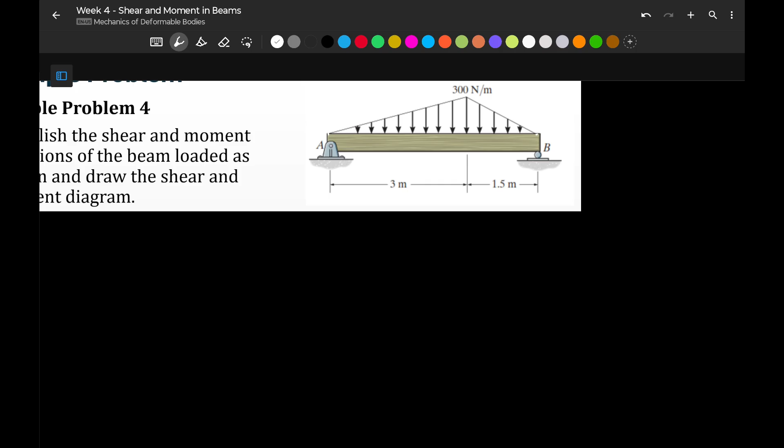So again, our step 1 is to identify the reactions. We have RA and RB. But before we do that, we need to divide our triangular load to analyze it easily, because its resultant is not at the center, not at 3 meters. They're separate, so let's cut our load at the point of 3 meters. We have triangle 1 and triangle 2. Both of these will have equivalent concentrated loads.

Natamahan ng hangin ng aking mic.

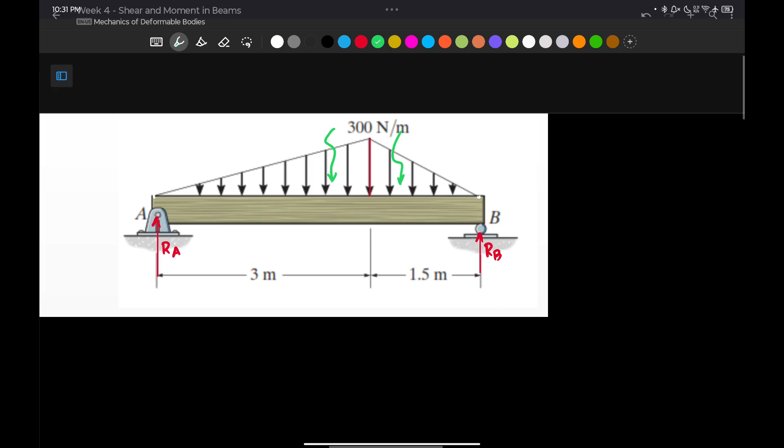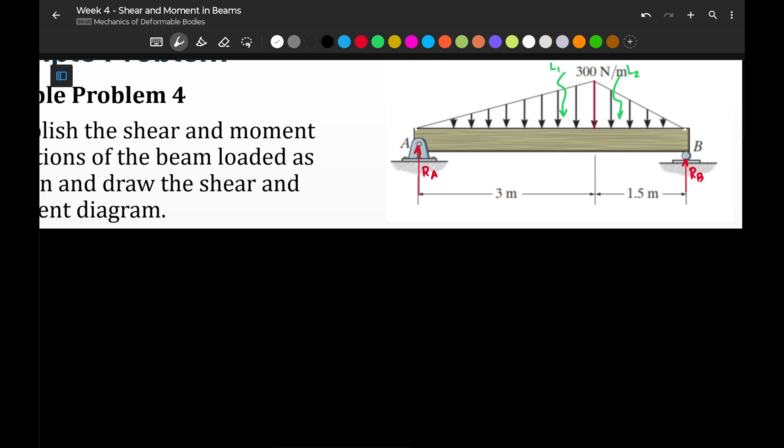Let's get the reactions. We can take summation of moment at A to determine RB, or summation of moment at B to determine RA - either one will work fine. Let's take summation moment at A equivalent to 0, assuming clockwise positive. The forces producing clockwise moment here are L1 and L2. Let's call this L1.

The moment arm of L1, since we measure it from this point, this one will be 2/3 of 3. And for L2, since we're taking moment about A, it becomes 1/3 of 1.5, and we have 3 meters here. 1/3 of 1.5 is 0.5, and 2/3 of 3 is 2. So from this figure, the moment arm of L1 is 2 meters from A.

So L1 times 2, plus L2 times its moment arm of 3 meters from A plus additional 0.5 for the centroid of the triangle, giving us 3.5. This is L1 and L2. Then we have reaction RB causing a counterclockwise moment, so that's minus RB, with moment arm 4.5, equivalent to 0 since there's no other force.

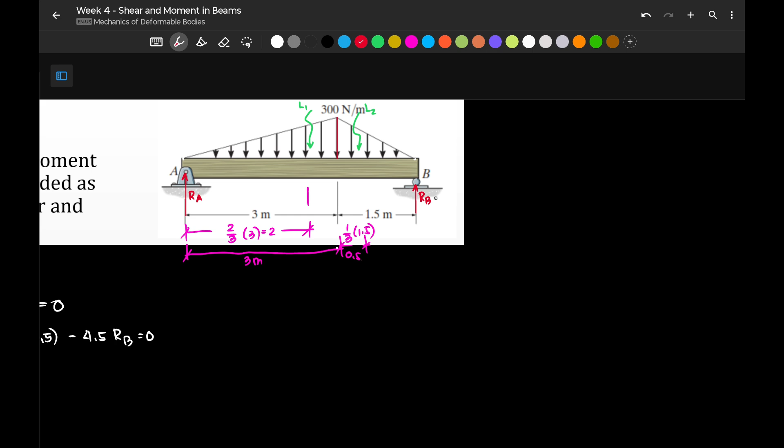Then for RA, we can now use summation of forces vertical equivalent to 0, with upward forces positive. So we have RA plus RB as the positive forces, then minus L1 and L2, equal to 0.

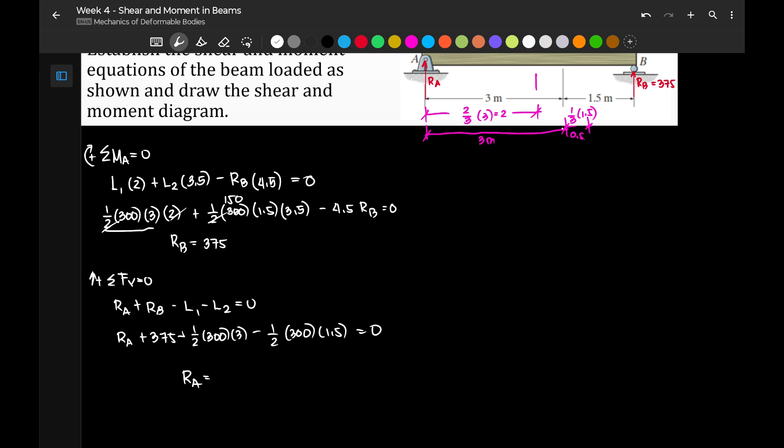RA is unknown, RB we already solved as 375. Our L1 is 1/2 of 300 times 3, and L2 is 1/2 of 300 times 1.5, and that should equal 0 for static equilibrium. So RA will be 150 times 3 plus 150 times 1.5, minus 375, giving us 300. Our units are newtons.

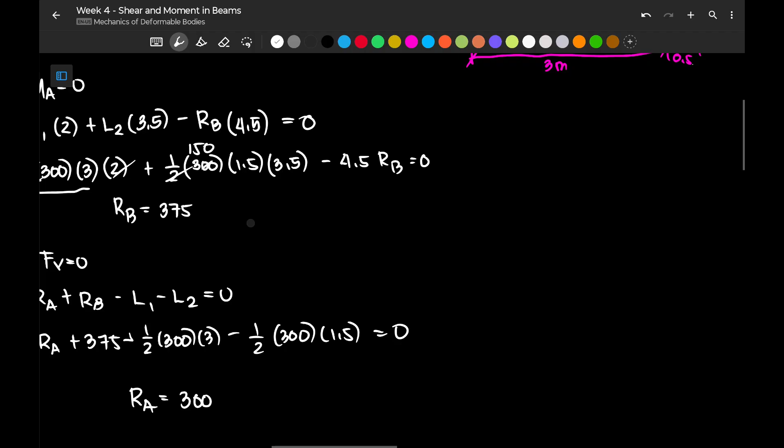Okay, so this is in Newton. This is in Newton, i-note natin rin, this is 300 Newton. Now, second step, establish natin yung mga segments or yung mga points na meron tayo.

Okay, so take note, meron tayong pagpapalit ng loading. Mukha lang siyang continuous yung triangle natin, pero the behavior of our triangular load, increasing siya from point A hanggang dito, then nag-decrease naman siya at point B. So nagkaroon ng pagbabago sa loading. Hindi lang magnitude o pagdadagdag o pagbabawas ng load, pati yung behavior ng load, kung saan siya tumataas, nag-increase or nagdi-decrease, kailangan nating i-note yun.

So let's call this point C. Okay, that is 3 meters from A. So meron tayong dalawang segment, A to C and C to B.

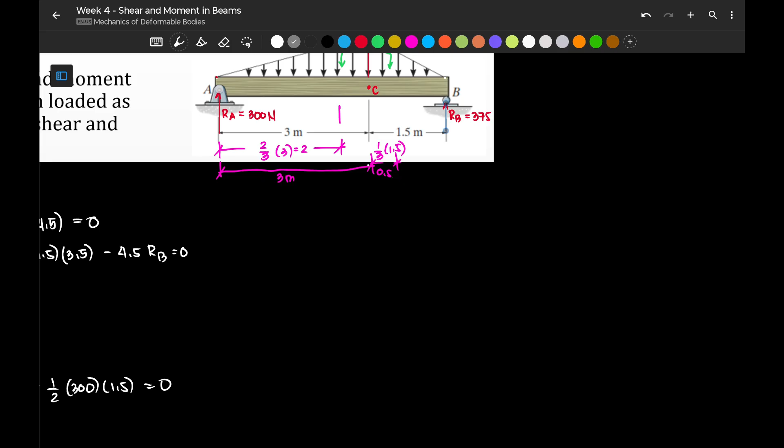Okay, so dalawa yung magiging putol natin, but for now, gagawin ko muna ay mag-establish ng vertical line dito para sa ating shear and moment diagram. Okay, ayun yung mag-autocorrect.

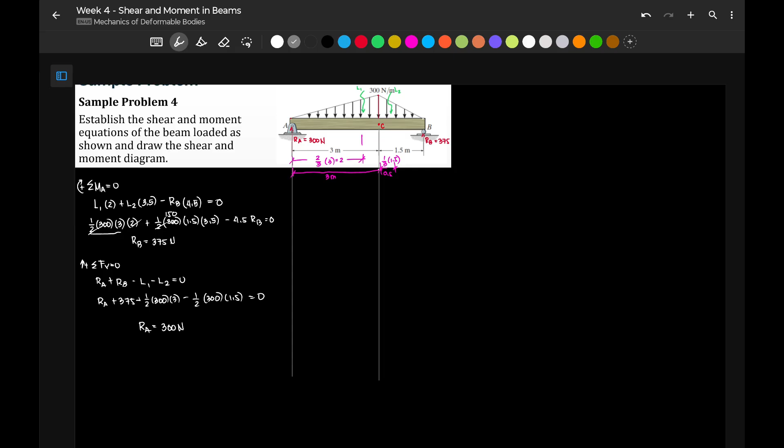Okay, so lengthen lang natin to ng konti. Pwede tayong gumamit ng method of area or method of section sa pag-determine ng diagram. Pero tanong din kasi ng problema sa atin yung equation, so isolve na rin natin yung equations.

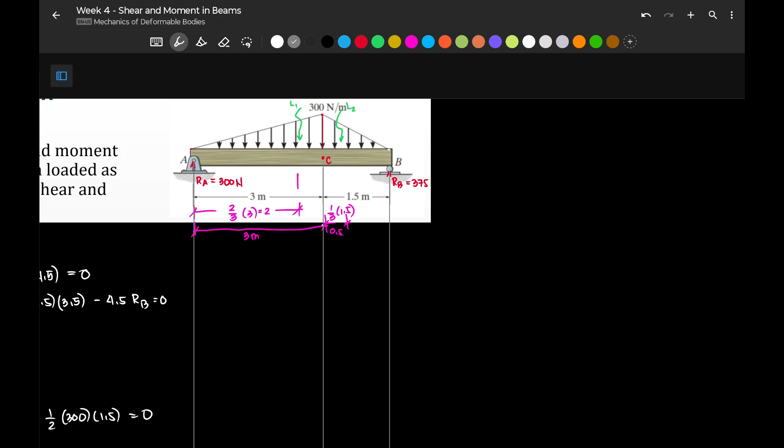Okay, so this one, for segment AB muna tayo, as AC rather. So for segment AC, ang meron tayo kay AC ay cut na lang natin anywhere. Pwede tayong mag-cut kahit saan, anywhere at AC, kahit saan ka mag-cut, okay lang.

So meron tayo ditong beam. I think I have to simplify na lang yung beam para masanay tayo, masyadong matagal. Ayan yung beam na lang natin. Meron tayong vertical reaction dito na 300 Newton, and then meron tayong triangular load. Bahin ko na lang kulay.

Ang distance nito, since arbitrary yung pagkakaputol natin o any value, we call this distance x. Unfortunately, nung nag-cut tayo, hindi sakto sa 300, hindi tayo dito pumutol. Dito lang, so hindi natin alam ito, tawagin muna nating F1. Okay, so dito ngayon, magkakaroon ng internal reaction, meron tayong shear at meron tayong moment. Take note of the direction, pababa si shear so that we assume na positive yung shearing na nangyayari, and si moment naman ay counterclockwise para mag-produce siya ng positive bending moment. Okay, sige, let's try to solve for the value of F1 first.

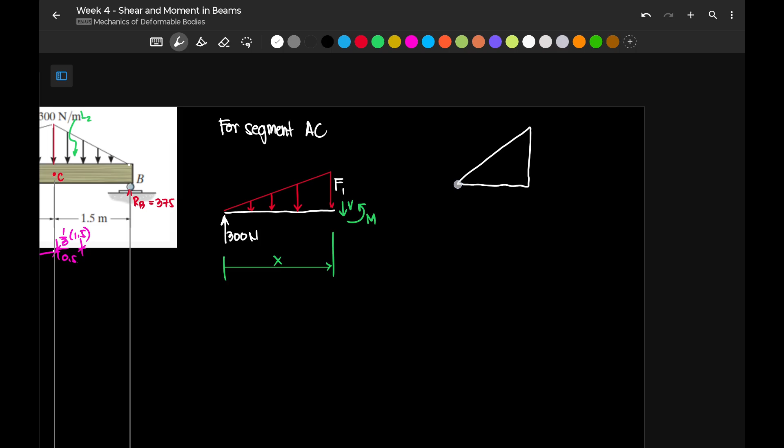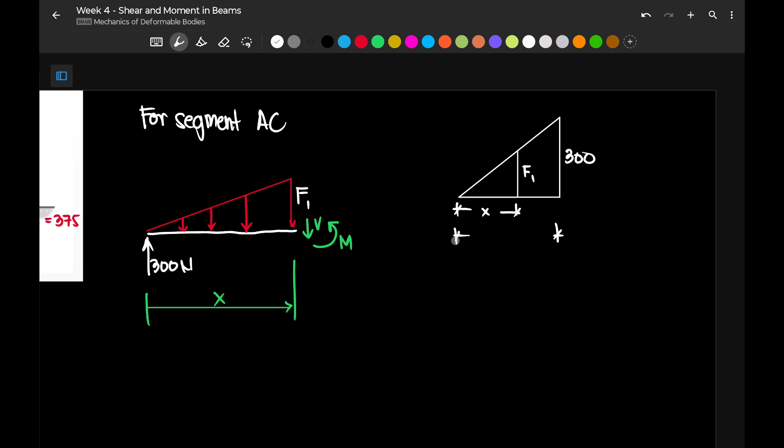Similar doon sa kanina, pwede tayong mag-ratio and proportion or similar triangle theorem. So ito yung triangle natin. Kanina, ang height nito ay 300. Pero since nagputol tayo dito, somewhere along sa gitna, F1 na lang yung nakuha natin. Ang distance ng F1 mula dito kay vertex ng ating triangle, that is x. Ang distance naman from the vertex of the triangle up to this point ay 3 meters.

So by similar triangle, we can say that 300 over 5, yung height ng malaking triangle over its length na 3 meters, that is equal sa height ng smaller triangle which is F1 over x, or F1 is 300, divide na natin to, 60x. 300 over 5, to confirm lang, 60x. Okay, so F1 is just equivalent to 60x.

Okay, so pwede na tayong mag-proceed sa shear equation. Let's take summation forces vertical equivalent to 0, assuming that upward forces are positive. So meron tayo ditong 300 Newton upward force, then may minus tayo, kunin natin yung equivalent load o equivalent concentrated load nitong ating F1, that is 1/2 ng F1 times ang kanyang length ay x. Okay, then may pababang shear force tayo dito, so minus V equivalent to 0.

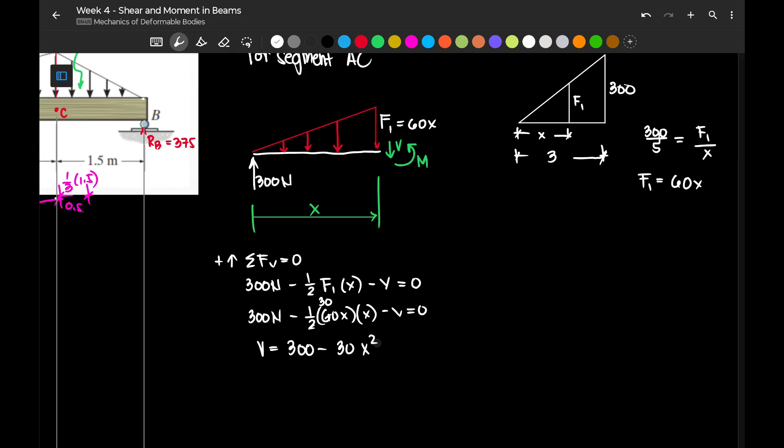So this is 300 Newton minus 1/2 ng 60x, that is our F1, times x minus V equal to 0. Or V is just 300 minus 1/2 ng 60 ay 30. So 300 minus 30x squared. That is the shear equation for segment AC, where the value of x should be greater than 0 but less than or equal to 3. So those are the limitations of this formula.

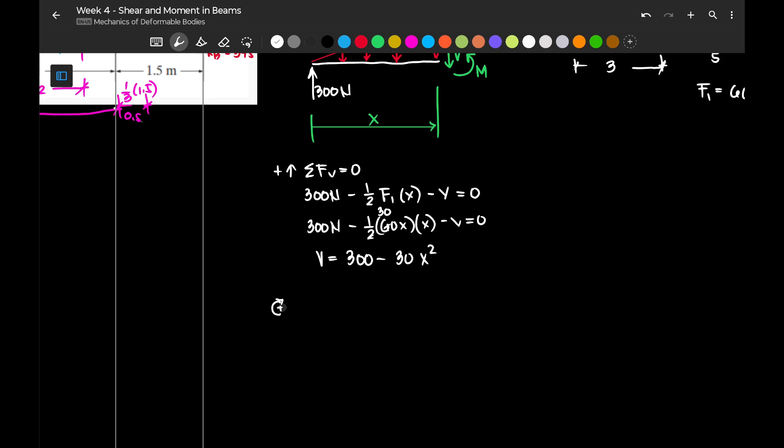Continue na ngayon natin sa moment, tsaka tayo mag-plot later on. Let's take summation moment assuming clockwise positive equivalent to 0. Saan tayo nagmo-moment? Dito sa point kung saan tayo nagputol ng beam. So positive yung rotation ng 300, so that is 300 times x, the moment arm.

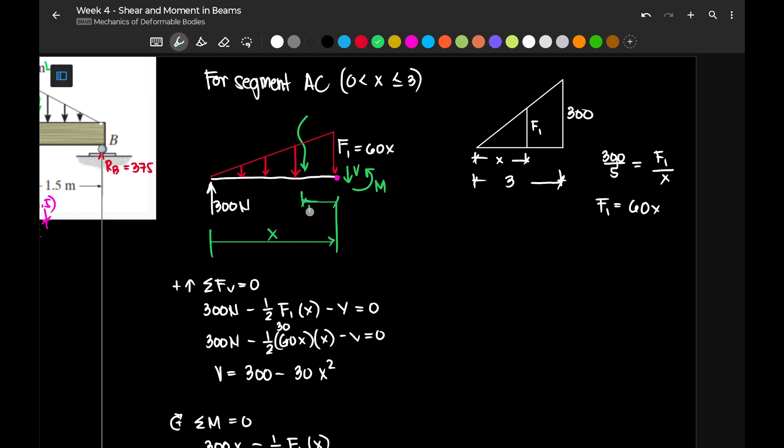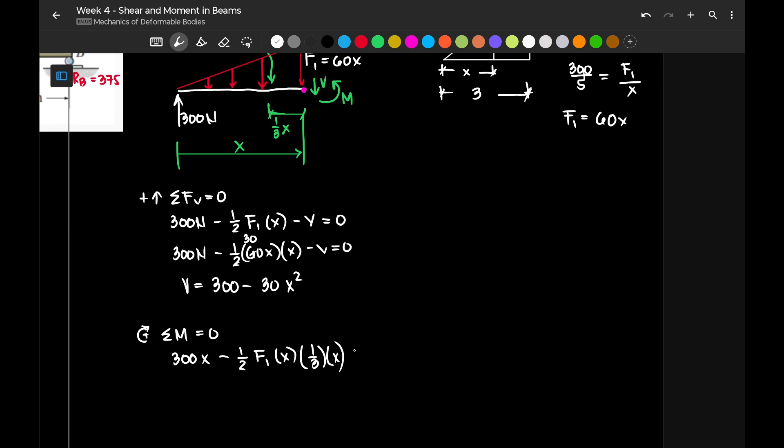And then meron tayo ngayon ditong F1 na uniformly varying, so the equivalent load niyan ay 1/2 ng F1 times yung length niya na x. And the moment arm, kung ito yung concentrated load niya na equivalent, since dito tayo nag-moment, this is 1/3 of x. Okay, so wala na tayong moment dito, pero may negative na internal reaction M dito, equivalent to 0.

So our moment for segment AC is 300 times x. Si F1, take note that this is 60x, so makakancel ito, magiging minus 30x times x times 1/3 of x. Okay, or our moment equation is 300x, 1/3 ng 30 is 10x cubed. So this is our moment equation for segment AC naman.

Okay, so let's proceed on the next segment. Puntahan naman natin yung segment CB.

So, for segment CB, meron tayo dito ngayon ay pababang force, pababa na yung triangle natin. Our values of x should be greater than 3 but less than or equal to 4.5.

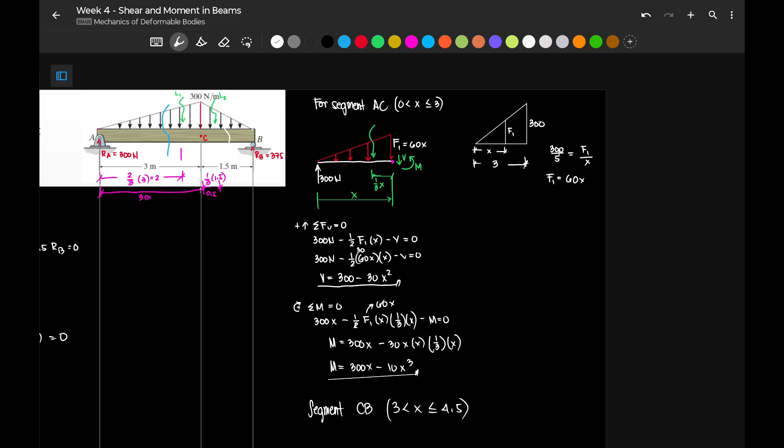Okay, kunin natin yung value. Yung section natin, yung beam natin ay putol. Meron tayong vertical reaction dito which is 300. Ang putol natin ay anywhere along segment CB, kahit saan dyan. Dito, meron tayong nag-peak dito yung 300 and then naputol. Masyado yata maigsi. Naputol naman pagdating dito.

Again, ito yung point kung saan ang length natin ay 3 meters. Ito si point C, ito si point A. Dito na lang sa ibabaw. Ito yung 3 meters, ito, ayan, this one. Ito ay 300, let's call this point F2. Ito yung naputol na force dito sa part na ito. Nung nagputol tayo, may force na lilitaw dyan, yan si F2.

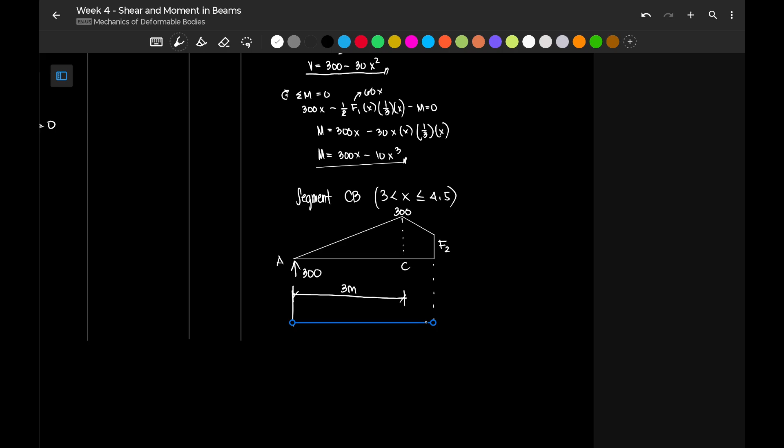Okay, and the distance is still x. Again, we have to find F2. Ano ba yung magiging value ng F2? Let's isolate the second triangle, si L2, yung triangle natin pangalawa. So, ang height ng triangle natin ay 300.

Ang kanyang length ay 1.5 meters, so this is 1.5 meters. Hinati natin, naging trapezoid, ito ngayon si F2. Take note, yung 1.5 meters ay kabuuang length nito. This is 1.5 meters. Ano kaya yung length nito? At saka yung length nito? Hindi natin to pwedeng sabihin x kasi hindi dyan nagsimula ang x natin.

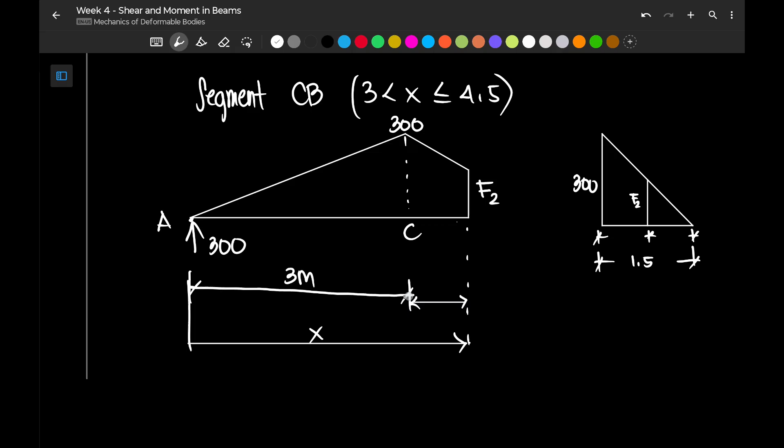Ang x natin ay mula kay point A. So, para makuha natin to, yung part na to from our illustration, itong point na to, this point, yan ay x, dito ay x, minus, bawasan natin ng 3, so this is x minus 3. Yung part na to is x minus 3. At yung natitira naman is 1.5 minus x minus 3. Hindi na kasya, ibaba ko ng konti itong 1.5.

Oops. Ba't nasama ka, boy? Okay. Yung natitirang maliit na part, that is 1.5, yung kabuuang haba, minus x minus 3. Or simply, 4.5 minus x. Okay, kasi kapag binuo natin yan, di ba, bubuin mo yung beam?

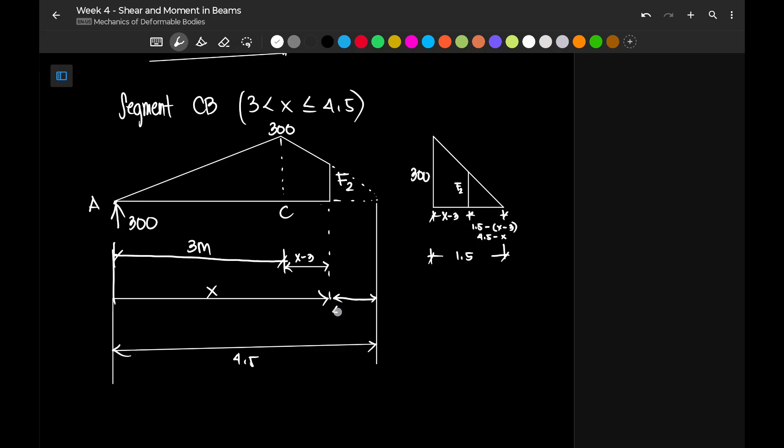Okay, yung distance na to, hanggang dito, ayaw niya mag-autocorrect. Pag binuo natin yung beam, yung distance, yung length ng beam natin is actually 4.5. So, yung natitira dito is yung kabuang length minus x, so 4.5 minus x. Kaya ito ay 4.5 minus x.

So, let's proceed, kunin na natin yung value ng F2. Again, similar triangle, we have 300 over its length na 1.5. That is equivalent sa height ng maliit na triangle which is F2 over 4.5 minus x. So, F2 is 300 over 1.5. Namatay na yung calculator ko. That is 200 times 4.5 minus x. So, this is our F2.

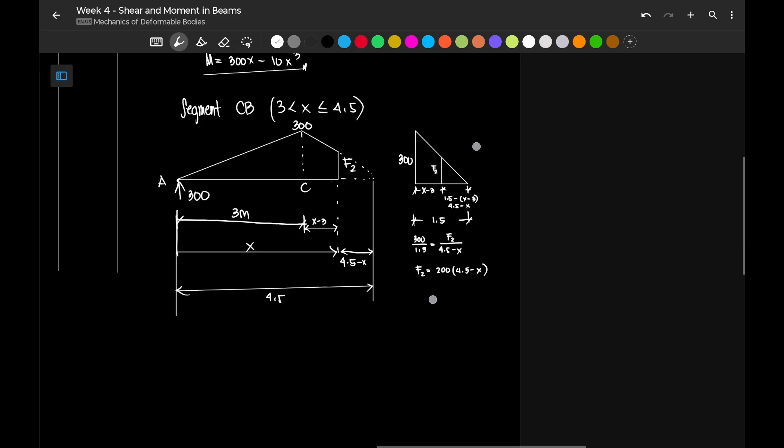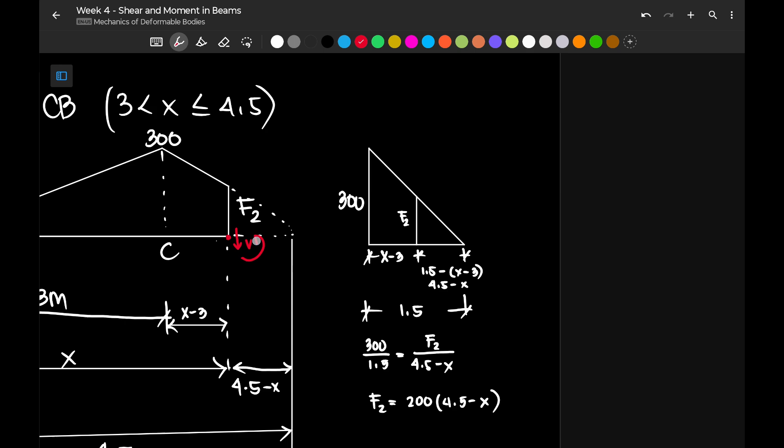F2 pa lang yung kinocompute natin. So, kunin na ngayon natin. Since alam na natin sa F2, kunin na natin ngayon yung ating shear equation. That by taking summation of forces vertical equivalent to 0, assuming upward positive. Hindi natin nailagay na at this point kung saan tayo nagputol, meron diyang internal shear na downward at internal moment na counterclockwise. So, ito pa rin yung point of consideration natin. So, what are our forces?

Meron tayong upward dito na 300. Okay, then wala na, so ang meron na lang tayo, meron tayong mga downward forces dito. Okay, so yan ang meron tayo. Yung itong larger triangle or yung mas mahabang triangle, buo na yung load na sakop natin yan. So, buo na natin i-consider ngayon yan. Ang area niyan ay 1/2 ng 300 yung kanyang height. Ang length naman niya ay 3 meters. So, hindi na si F1 ang gagamitin natin kasi buo na yung triangle.

Then, yung pangalawa naman, that is a trapezoid. So, pwede nating hatiin into a triangle and a rectangle, or pwede nating gunin ng buo. Pero since magmo-moment tayo, mas madali kung hahatiin natin ito into a triangle and a rectangle. So, pagdating sa shear, ang meron tayo ay yung rectangle that is F2 times ang distance na lang niya o ang length na lang niya ay x minus 3. Okay, para naman dito sa triangle, kung ito ay F2, therefore yung matitira dito ay 300 minus F2. So, we have here para sa triangle, minus 1/2 ng 300 minus F2, times ang kanyang length ay x minus 3 din, minus yung ating internal shear na V equivalent to 0.

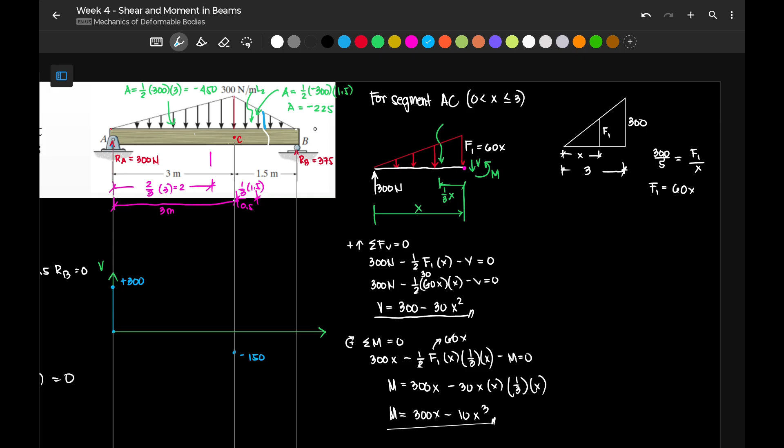Next, if this is 300, the change in load is negative 450. So plus 300 minus 450, we go to negative 150. From negative 150, the change in load is negative 225. So negative 150 minus 225, we go to negative 375.

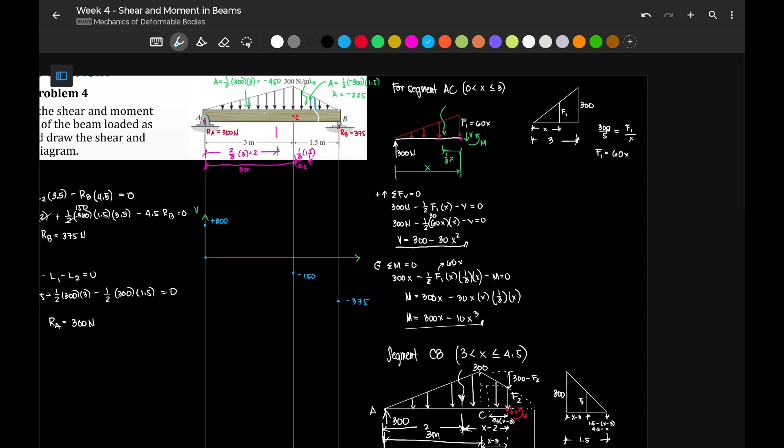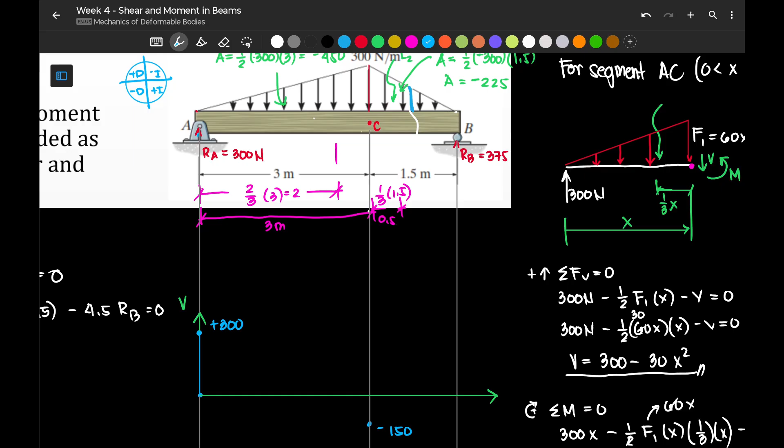Okay, let's plot our curve. We said we can use the PNDI circle - positive decreasing, negative increasing, negative decreasing, positive increasing. Our load from A to C is negative because it's going down, and increasing. So this is our curvature - quadrant 1, going down.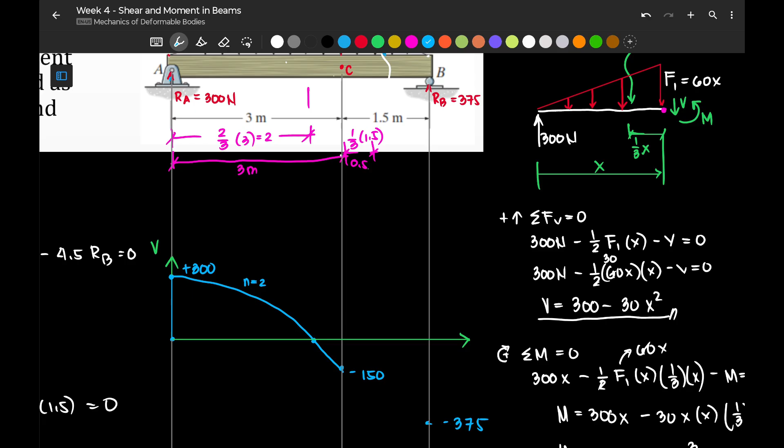Since the degree of our load is 1, the degree here is 2. But we have a point of zero shear here. Next, what about at this point? Our load now is still negative but decreasing, so this is negative decreasing. The value becomes smaller from 300 to 0, so our curvature should be concave downward.

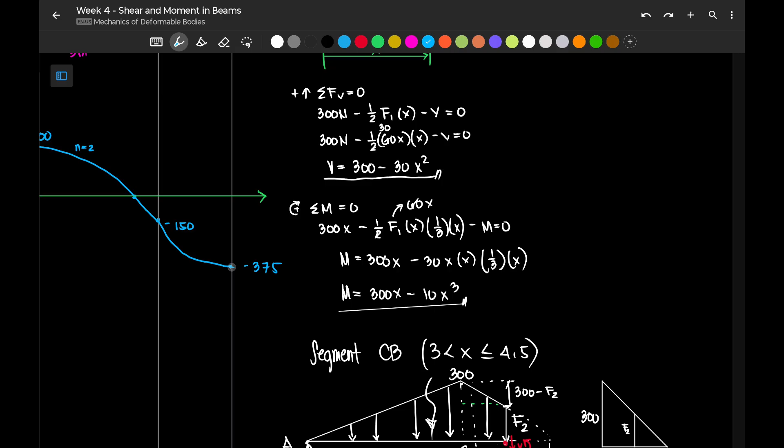N is equal to 2 still. And then at this point, at point B, we have a reaction of 375, closing out our shear diagram. So the area of the shear diagram is easy.

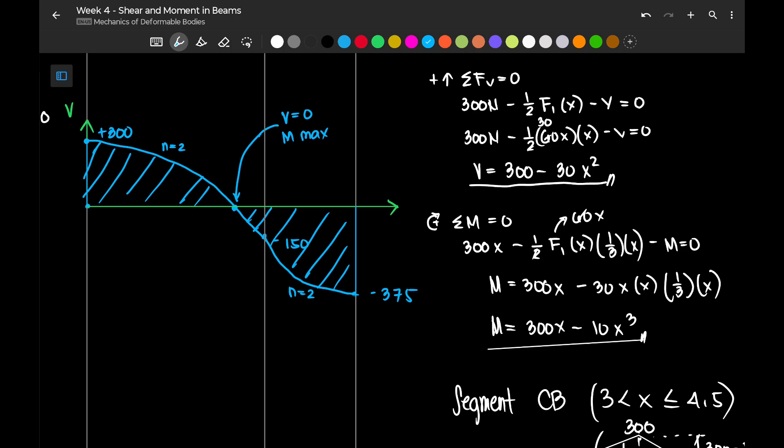The problem is the moment diagram, because we have a point of zero shear here. Take note, at the point of zero shear, when V is 0, our moment is maximum, and that's usually what the problem asks for. So what we'll do, since we know this segment A to C, or the point of zero shear, is in segment AC, let's use the equation.

Let's find the point of zero shear using this equation: V is equal to 300 minus 30x squared. We said the shear is 0, so let's equate this to 0 and solve for x. There will be two values, pick the positive one. So we have square root of 10. I'm not mistaken.

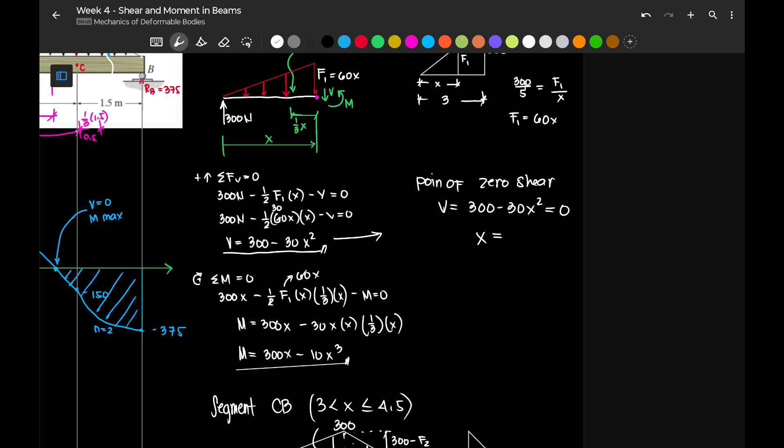3.16, so this doesn't fit. We have 300 minus 30 alpha x squared, alpha equal to 0, shift solve - 3.16. So this isn't possible because it exceeds the limit.

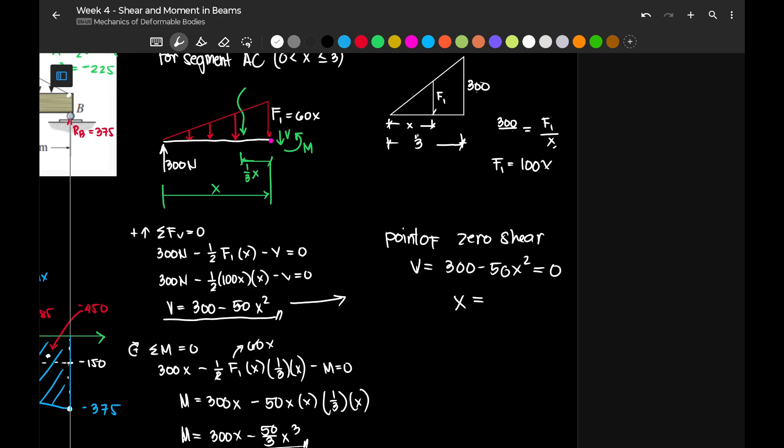Okay, so we made a mistake - that one was fatal. So what happened? Previously, what I wrote here was 5, which is why this became 60x. That is wrong - I misread it, thinking I wrote 5, but it's actually 3. So proper, clear writing is very important.

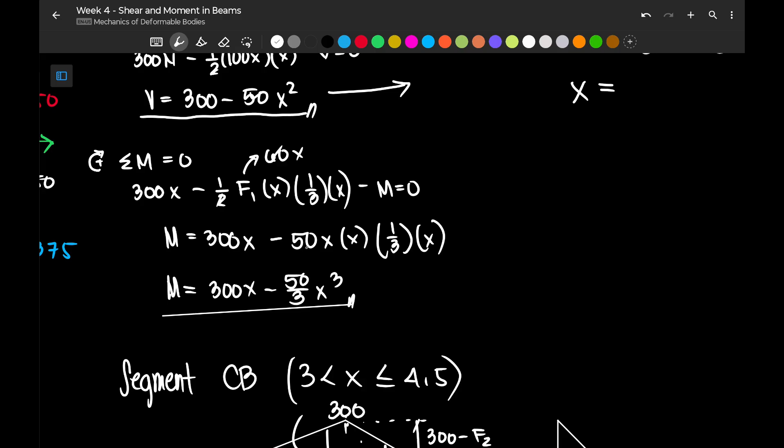So what happened is our value of F1 changed from 60x to 100x. So our equation for shear for segment AC is 300 minus 50x squared, and for our moment, that is 300x minus 50 over 3, so it becomes 50 over 3 times x cubed. Nothing changed for the second, shorter segment, since F1 isn't involved there. So our formula for moment stays the same, and our formula for shear stays the same.

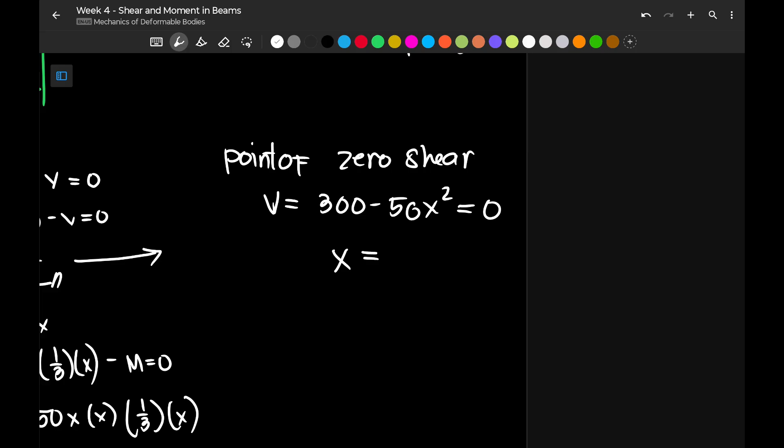Okay, let's correct this value. Since we found the location of zero shear, V equals 300 minus 50x squared is our formula. We can substitute 0 into the shear equation to get the value of x.

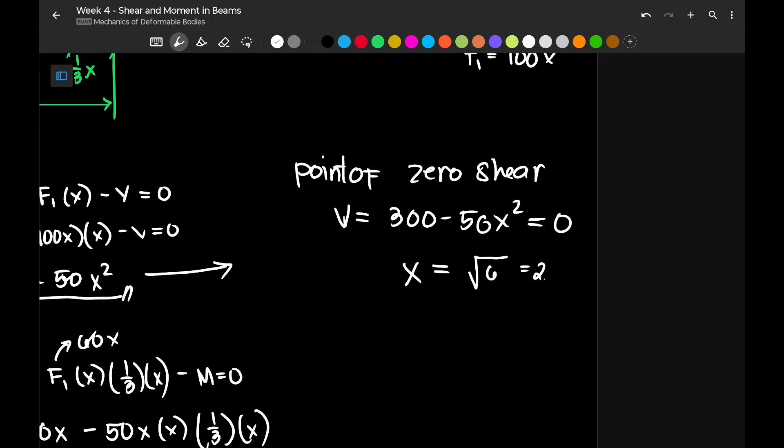We can transpose. Square root of 6, so this is square root of 6, or 2.449. So this is the location of our zero shear.

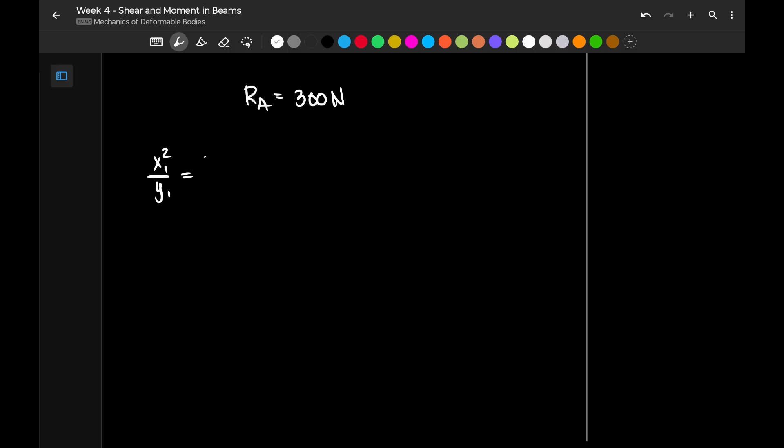Another way to do it is using the squared property of parabola. Since our vertex is here on the shear moment diagram, we can use this property: x1 squared over y1 equals x2 squared over y2. We can also use this for the third degree: x1 cube over y1 equals x2 cube over y2. So what do x1, y1 and x2, y2 refer to? They are the coordinates of a point on the parabola.

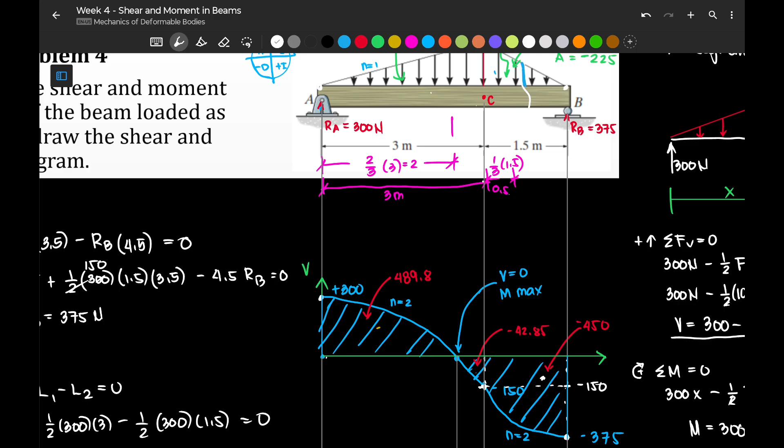Let's take this parabola. We need to draw this parabola. The vertex is at this point. Why is that the vertex? Because here our load becomes zero. Let's isolate that parabola.

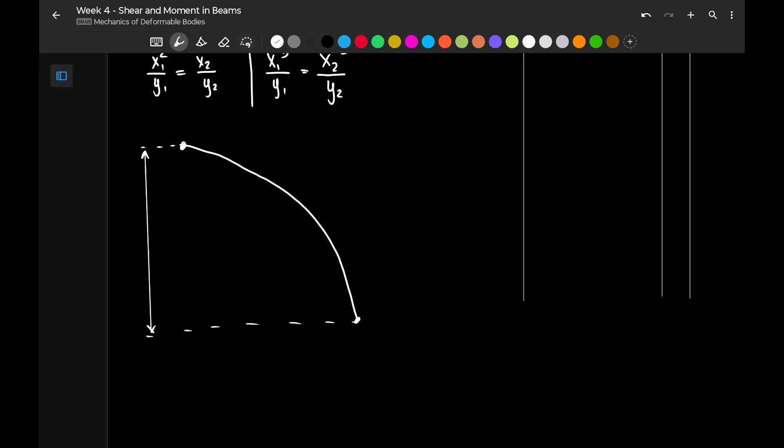What we're getting is just the vertical distance - we're not considering the sign convention. So if it's 300 up to here, then 150, the total height of our parabola here is 450. Then the horizontal distance from this point to this point is 3 meters.

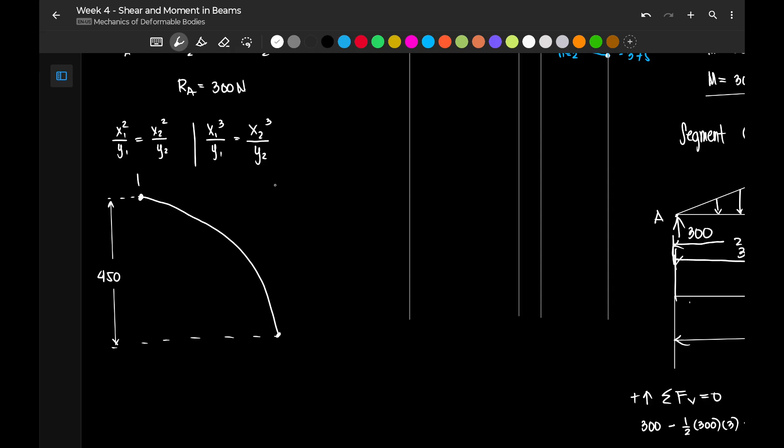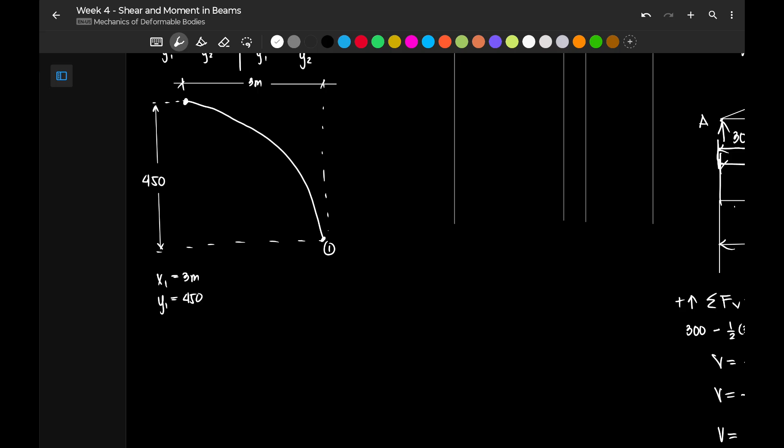So we can say this is 3 meters. So we have two known points. If this is our vertex, we can assume its coordinate is 0,0 for now. So what we know, our x1, is 3 meters, if this is our point 1. And y1 is 450 newtons, or kilonewtons maybe.

Newtons actually. Then we have an unknown point 2. Point 2 is the unknown point with missing data. So point 2 is somewhere around here. Let's say this is point 2. And the location of our point 2 is 300 downward, because point 2 is exactly at the value of our beam at zero shear.

So this is 300, right? So this one is 300. And we don't know this distance.

This is what we solved earlier, the x value. We know it because we already solved it. But if we're trying to use this method, we don't know it yet, right? This is our, let's call this x also, measured from the vertex. So this is our x2, unknown. So let's apply the squared property of parabola to this one.

What we get is 3 squared over 450, that is x1 squared over y1, equivalent to our x2 squared over 300. So here we can say x2 should equal the square root of 3 squared over 450 multiplied by 300... sorry, let me redo that.

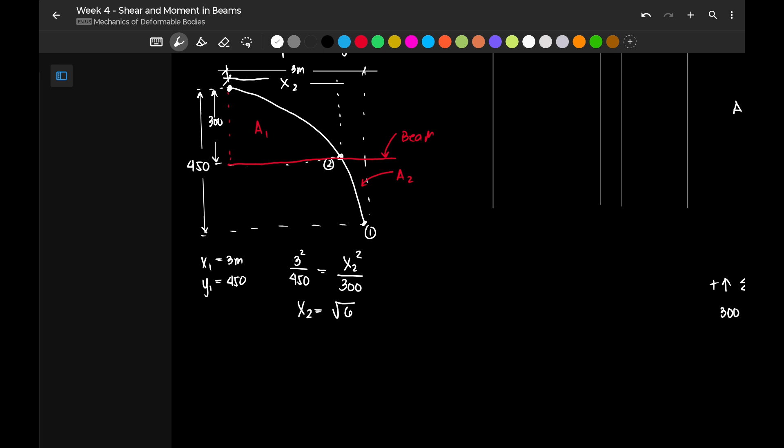So let's call this one area 1, and let's call this part area 2. Let's try to solve using the method of area. So in getting our area, as I discussed earlier, we can use the formula 1/3, 2/3 if our parabola comes from the vertex or covers the vertex. So how do we do that? For area 1, it's easy since it has the vertex, we can use 2/3.

Itong part na to magiging 2/3 kasi siya yung bulging, siya yung naka-bulge. This is 2/3 ng yung length niya ay x2 times 300. Or that is area 1 is 2/3 ng square root of 6 times 300.

Okay, burahin ko na dito para hindi magulo. So that is 2/3 of square root of 6 times 300. We have

489.898 newtons. Now, pagdating naman dun kay area 2, this one's a bit complicated kasi ang area na hinahanap sa atin ay itong part na ito. Okay? So, paano natin kukunin yung part na yan?

Sir, pwede natin gamitin si 1/3. Hindi natin pwedeng gamitin si 1/3 kasi wala doon sa parabola yung vertex. Kung kukunin ko yung 1/3, dapat manggagaling yung parabola ko sa vertex. But ang pwede natin gawin is, we can determine yung area ng parabola dito.

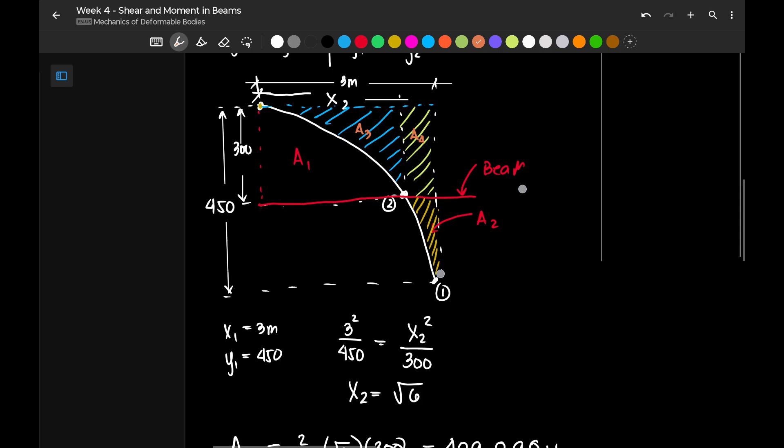area 3 at ito naman si area 4. So si area 3, pwede nating makuha kung itong area 1 is 2/3, si area 3 naman is 1/3 kasi nandun yung vertex at they are in the same rectangle lang naman. Ano? So hahatiin lang nila yung rectangle, yung malaki ay 2/3, yung maliit naman ay 1/3.

So si area 3 is magiging 1/3 square root of 6 multiplied by 300. So that would be 1/3 na square root of 6 times 300. We have 244.949 Newton. Okay. Now si area 4, rectangle lang ito.

Rectangle lang siya na ang kanyang length naman ay 3 meters, yung kabuuang haba hanggang dito, bawasan natin ng x2, kaya 3 meters minus x2, ang kanya namang height ay 300. So we have area 4 equivalent to 300 minus square root of 6 times, 3 meters rather, 3 meters minus square root of 6 times 300.

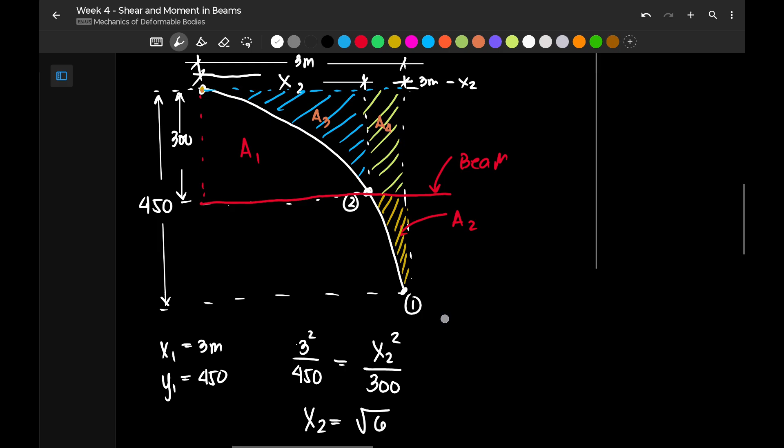Okay? 3 meters minus x2 times 300. x2 is square root of 6. So we have now 3 minus square root of 6 times 300. We have the area of 165.153 newtons. Now, take note, ang sinolve na lang natin ay si area 3 and si area 4.

Pero ang hinahanap sa atin ay si area 2. So, meron tayong malaking parabolic spandrel dito. Okay? Na ang kanyang height ay 450, ang kanyang width ay 3 meters. Yung malaking parabolic spandrel na yan ay binubuo ng area 3, area 4 at area 2.

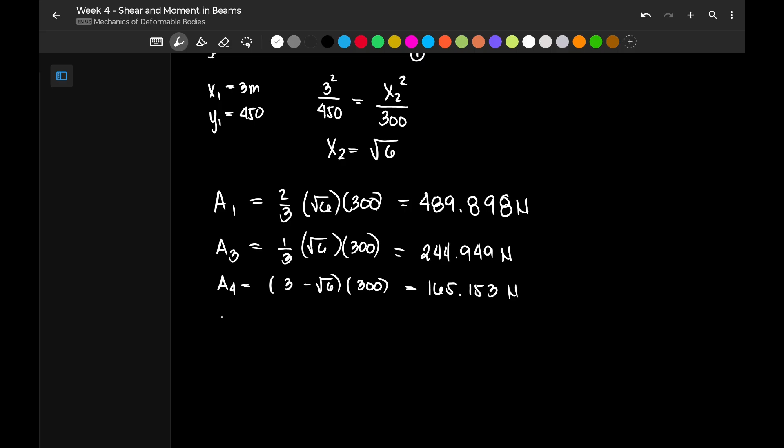So, basically, yung bigger parabolic spandrel, ang kanyang formula ay 1/3 kasi siya ay naka-concave. Yung pag naka-concave, ang ginagamit nating formula ay 1/3. Kapag naka-bulge, 2/3. So 1/3 ng 450 times 3.

Ito yung malaking parabolic spandrel. Okay? This one, yung mas malaki na to. Okay? And that is equal sa area 2 plus area 3 plus area 4. So, since meron na tayong area 3 and area 4, we can now solve for area 2.

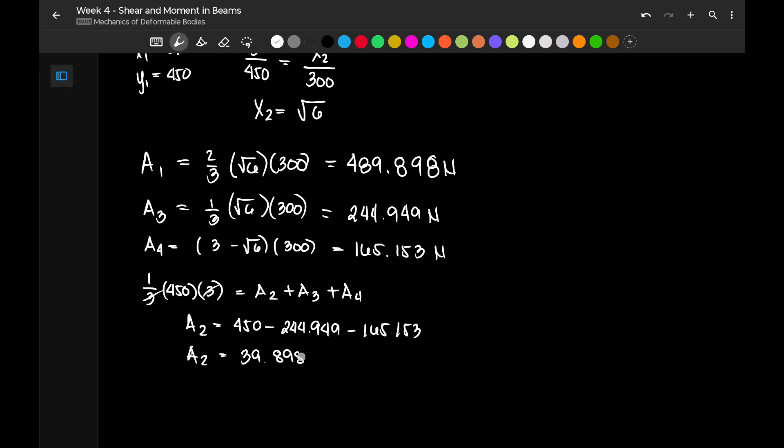That is 450 minus 244.949 minus 165.153. So, the area 2 is 450 minus 244.949 minus 165.153. Meron tayong 39.898 Newton. This is the area 2.

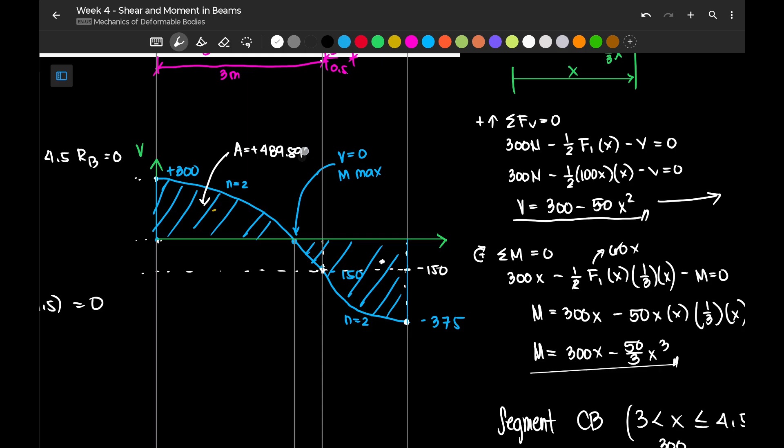So, lagay na natin dito sa ating graph. So, we have now, ang ating area 1 ay 489.898. So, the area is positive 489.898. And then, ito namang maliit na to, ang kanyang area ay negative yan kasi nasa ilalim, 39.898.

So, area is negative 39.898. So, ang kulang na lang natin ay yung area na ito. So, let's call this area 3. Okay. So, si area 3, since dito naputol yung ating calculation kanina, meron tayong parabola dito na bulging.

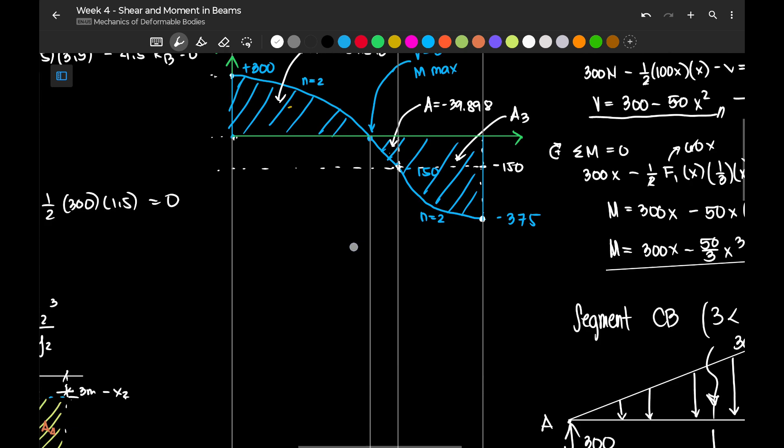Okay? Na ang vertex ng parabola natin ay kung saan nag-zero yung ating triangular load. So, nasa point B ang vertex natin. Ito ang vertex, may parabola tayo, tapos may rectangle pa tayo doon sa ibabaw. So, let's isolate that part, yung second part ng ating

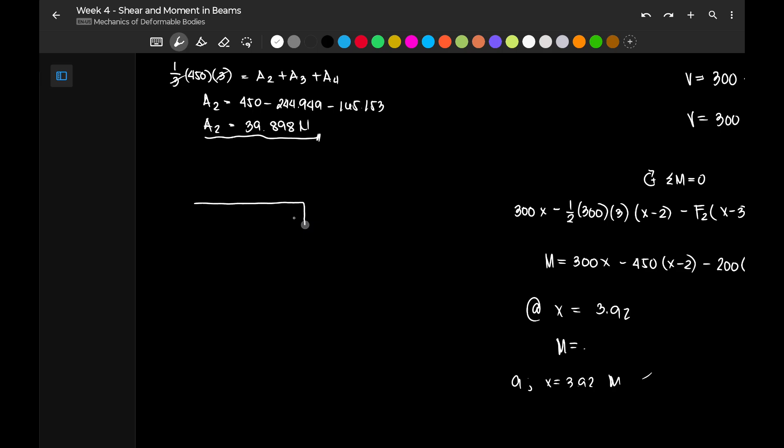Shear and moment, ng ating shear diagram. Wala pa pala tayong moment diagram. Okay? So, may rectangle doon sa taas, and then ito yung ating parabolic spandrel, di ba?

So, ito ngayon, yung part na to, kung ito yung ating beam, ito yung beam natin, itong part na to, this is 150, di ba? Ayan, sa ating shear diagram. This is negative 150. Di muna natin nilalagay yung negative, pero kung sanay naman kayong maglagay ng negative, okay lang din yan. So, dito ngayon, itong part na to, that is 375 naman.

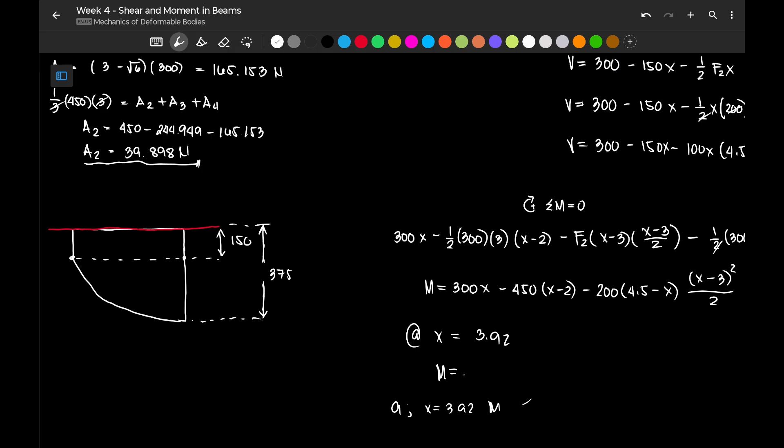So, this is 375. Why is it a broken line? Then, of course, the remaining value is 225 if we subtract. So, that's 225 remaining. Here's our vertex, because this is where our load from the load diagram becomes zero. Then, our length horizontally is...

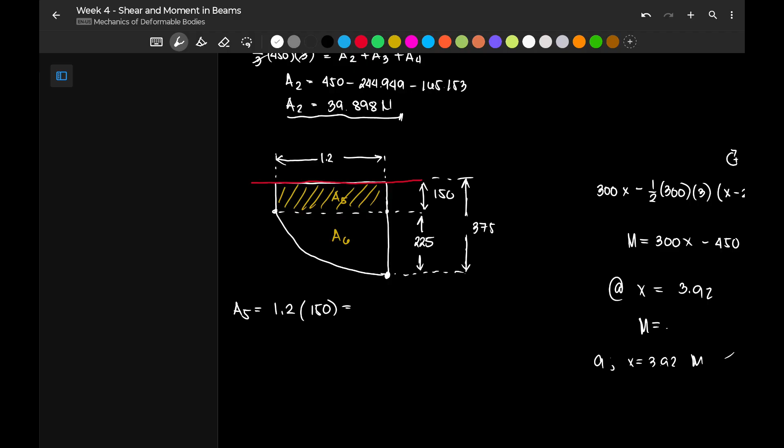We have 1.2 as its length. Its height is 150. So 1.2 times 150... sorry, the distance is 1.5, not 1.2. Where did that come from? So this is 1.5. So this is 225 newtons.

For area 6, again, this is a parabolic spandrel. We can use 1/3, 2/3 because the vertex is included in the area we're taking. Okay, if the vertex is not included in the area, you can't use 1/3, 2/3 — you'll have to add and subtract, similar to what we did on area 2. Okay, so here we can go directly to the formula since our area bulges, that is 2/3 now.

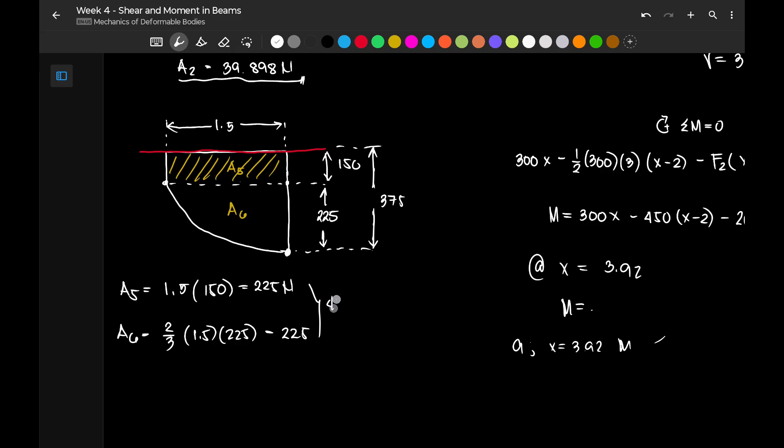Our height now is 225 and our length is 1.5 meters. So what we get is 2/3 of the 1.5 meter length. 225 is the height of the parabolic spandrel. That is also 225, so the total of this area is two times 225, which is 450. So this area here is equivalent to negative 450.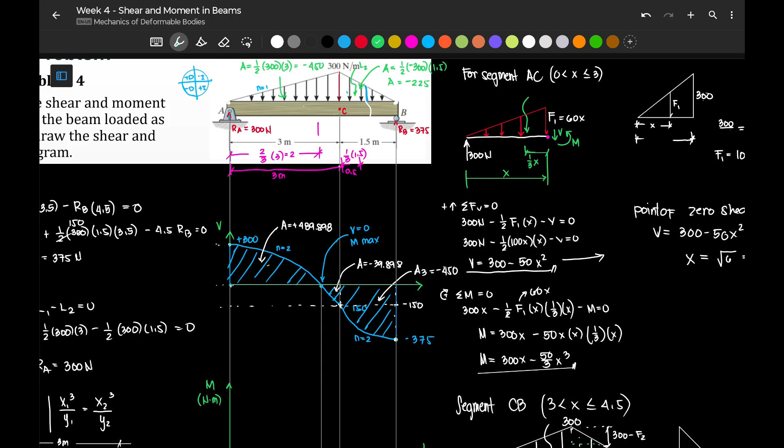So unless there's an applied moment there, this is 0. Okay, so our shear and moment diagram starts at 0. According to the problem, we have a 489 positive increase in moment. So at this point, let's plot it here. Assume that's 489, so we have...

489.898. Then here, we have negative 39.898. Minus that, 898. We're left with positive 450 here. This one is positive 489.898. And then here, we have negative 450. So it goes back to 0. Let's connect the dots.

Okay, so for the first part of the curve, we have positive then decreasing value. This is the curvature, quadrant 1. Okay, so our curvature is this. And the degree of our curve now is 3 — cubic, this is a cubic spline now.

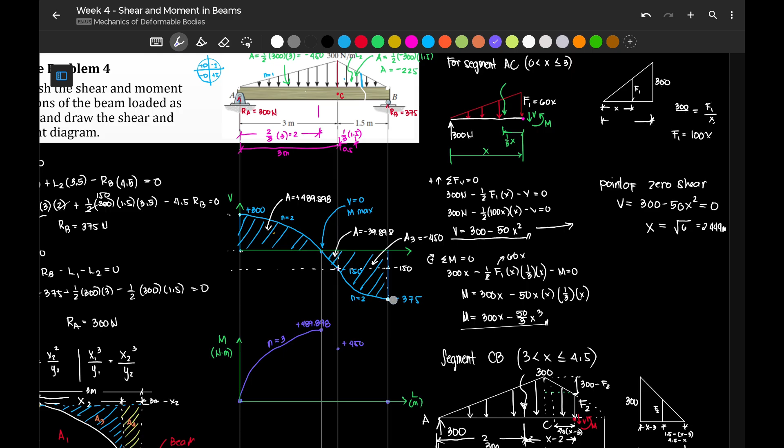Then for our second one, this is actually continuous. Continuous, negative from 0, increasing from this point, increasing again from 150. So we can align this. It doesn't line up. Okay, so it's negative increasing, that's why our curvature is this. Let's just align positive 450 here.

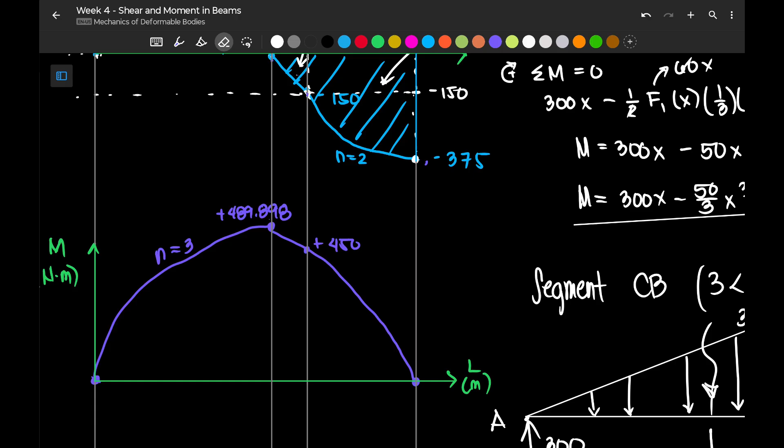Okay, so this is our moment diagram for this problem. This type of problem is one of the hardest problems in shear and moment diagrams. It looks simple. To be honest, it really does look simple, but it's really complicated once we get into the equations, when a triangular load or uniformly varying load is involved.

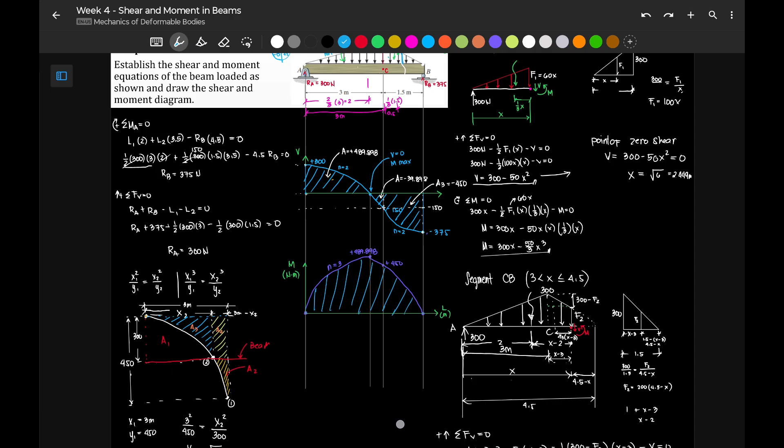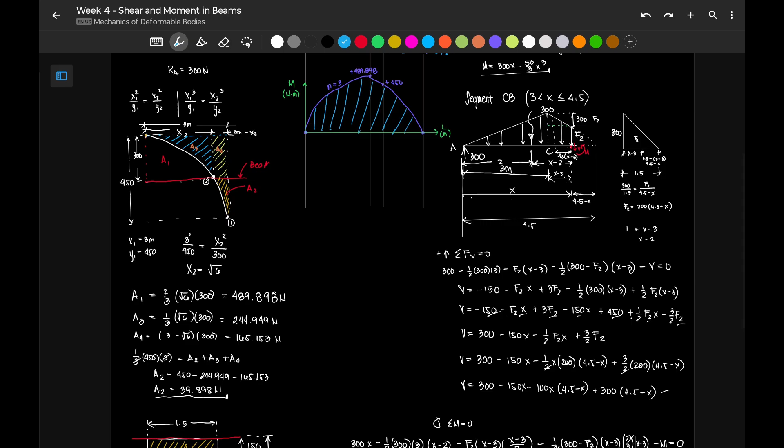Okay, so that's it for this problem. This one is very difficult. It's not at the introductory level, it's already at mastery level. So if you're trying to watch it, maybe you should also watch my previous videos about shear and moment diagrams, and it will also help to watch my old videos about simple beams that I solved there. Okay, so that's it for this discussion. See you on the next...